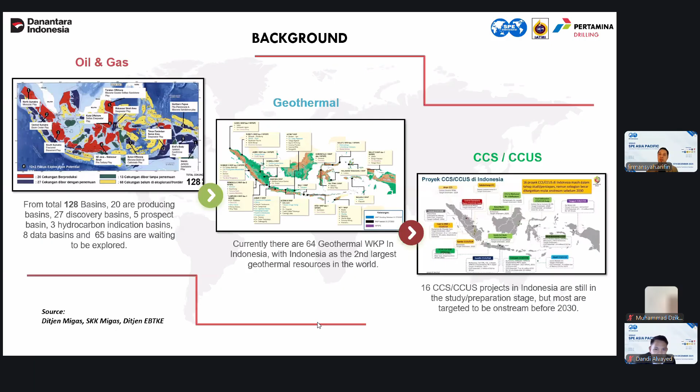This is from SKK Migas: next year we have a target of 1,000 wells to be drilled, and by 2027 we will have 1,117 wells to be drilled. So this is a very huge activity for drilling, and not only drilling but well intervention as well. We will have huge activities in Indonesia. So hopefully we will have an oil field services industry strong enough to support all these targets and objectives.

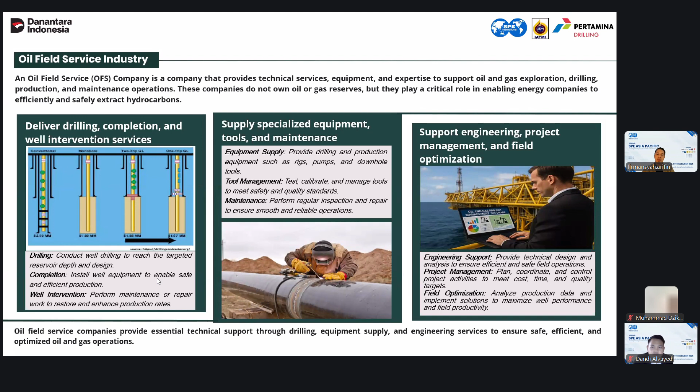And even now, with the era of digital technology and artificial intelligence, we may support engineering, project management, and field optimization. That will benefit the oil and gas operators. This is the taxonomy of oil and gas, where we can say that this industry is still in emerging markets. That's one of the conclusions in my research: since we still have huge opportunities in Indonesia, this is still an emerging market.

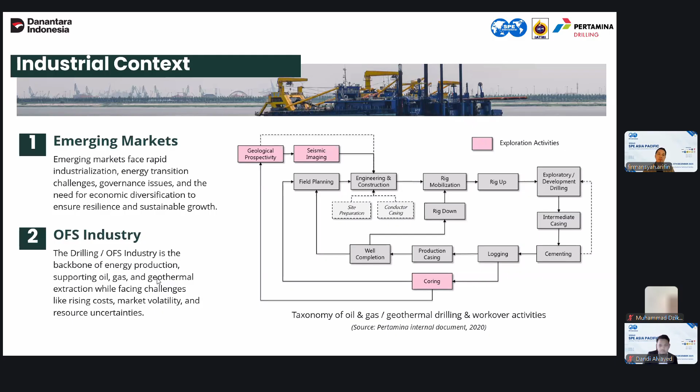This is Indonesia. I believe there are a lot of oil field services companies in Indonesia. In Indonesia, we have two associations. We have APMI; I myself am on the board of executives in APMI. APMI is Asosiasi Perusahaan Pengeboran Minyak, Gas dan Panas Bumi Indonesia. This is the only drilling contractor association in Indonesia. And of course, we have the global association, IADC, the International Association of Drilling Contractors. So both national and global companies are part of APMI and IADC.

I will start to bridge between the business and technology. As we know, OFS has a long and rich history since the first oil was found, and then spring pole drilling, the first gas well, how the rig was designed like a derrick, the rotary drilling concept in 1845, the mechanical percussion drill in 1849, and the Drake well. The Drake well in 1859 is very famous as the modern drilling well.

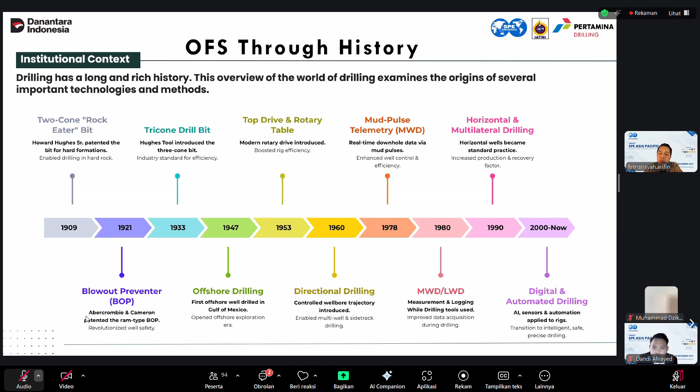And in the 2000s, up until now, we started digital and automatic drilling. For example, in PDSI in the 2000s, we started to use the latest cyber technology of the rigs, and not only rigs, but the equipment to support the drilling wells.

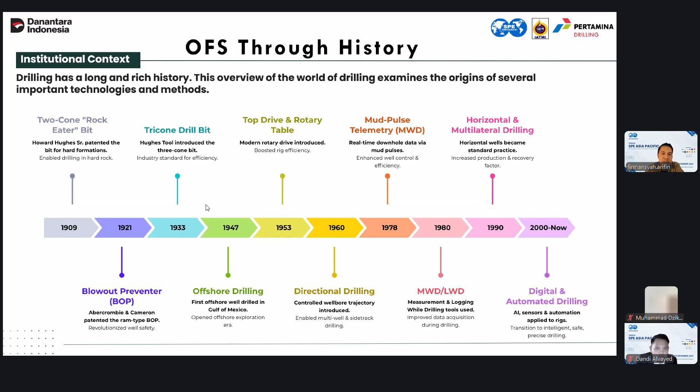Such as cementing, directional drilling, and other services. Okay, since I am as Pertamina Drilling, I will elaborate about PDSI's strategic roles as the largest oil field services company in Indonesia.

Why do I say PDSI is the largest? Since currently we have 58 rigs. Of those 58 rigs, 53 are land rigs, ranging from 250 to 2000 horsepower. We operate 3 jackup rig units with strategic alliances, and we have 2 offshore heavy workover rigs. This is standard access rig, 2 units. And in terms of assets, we have more than 110 assets.

Directional drilling, cementing - we have cementing units, drilling fluid, gas monitoring, and almost all kinds of services needed for drilling activities. And today we have the capability.

PDSI has the capability to deliver wells. So not only standalone services, just like rig or directional drilling or cementing, but we have the capability to deliver wells.

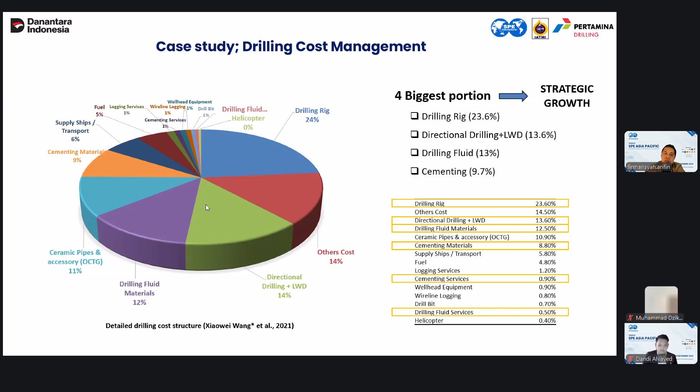Okay, I'm starting to elaborate about the rig technology evolution. Since PDSI is strong in land rigs, we have almost 50 land rigs, so I will elaborate on the modern land rig.

This is from the paper of Major et al., in 2024, already published as well. He put together the history of the modern land rig. You can see here, starting from the 1960s, what we call self-elevating drilling rig, with optimization on transition from derrick to mast. And then in the 1990s, land rigs with retrofitted DC top drives, with optimization in drilling ahead with fewer connections.

By using top drive, as we know, we will have less connection time compared to using Kelly or conventional technology. And then in the 2000s, retrofitted AC drilling rigs, with optimization from DC to AC, improvement in top drive performance, AC top drive. And then in 2002, the first land rig with integrated AC top drive and AC rig controls, with optimization of operational and rig-up efficiency.

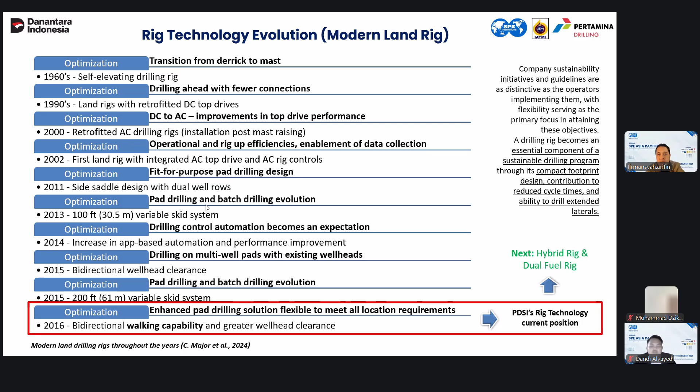This is PDSI walking rig, the latest land rig technology, based on SPE paper as well. We can see here this rig has experience with very good performance.

You can see here several robotic systems already put as the technology of this rig. For instance, the automatic catwalk system, which is common today. The cyber system with the latest rig digital system, and then for this land rig, we put the Iron Roughneck ST80s.

So with the capability of walking, based on our experience, we can optimize the drilling time before the target. This is one of our experiences using this rig. Previously, the target was 434 days.

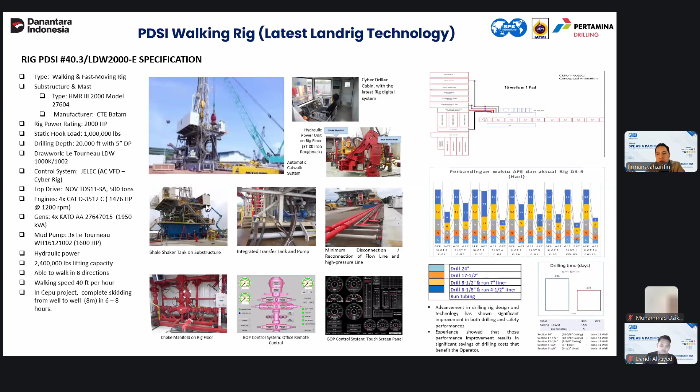Previously, the conventional rig for this system didn't have the capability to move in eight directions. So we created technology with a skidding system and what we call a rotating substructure, with rotating substructure capability. So the substructure is possible to rotate 360 degrees and move in any direction.

Previously, if we wanted to move from one well to the next well, it took 5 days. With this capability, it's now less than 1 day. So it creates efficiency and optimization for operational performance. That's our capability in rig technology.

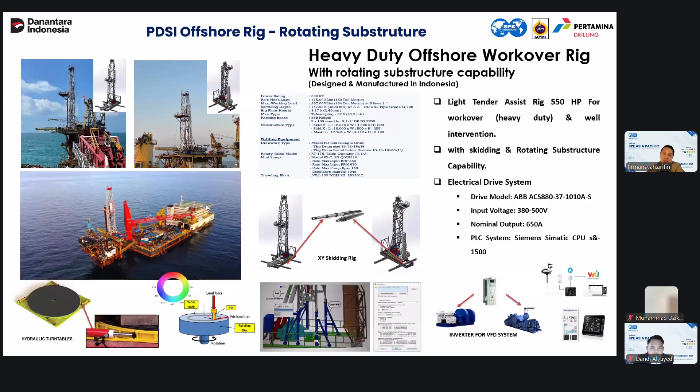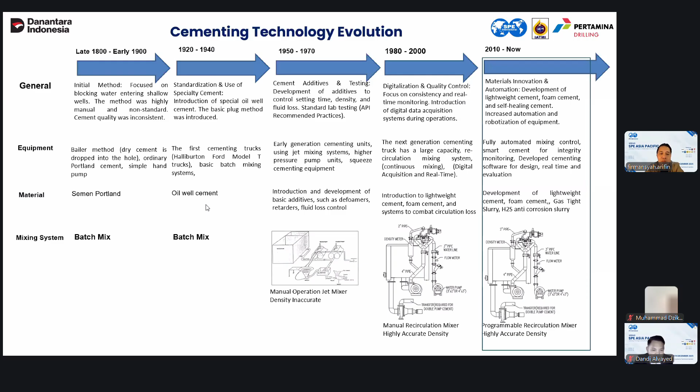Recently we have several cementing technologies here, from the evolution of cementing technology from the 1800s, then 1920s, 1950s, 1980s, and 2010. PDSI, of course, jumped to the latest technology for the cementing unit. Currently we have 5 units of cementing units — the next generation cementing truck, already purchased by PDSI, 5 units.

We have our next plan. I discussed with our cementing units that our next plan is software design playback, real-time monitoring and evaluation at the same time. That will bring benefit and optimization for operations in the future.

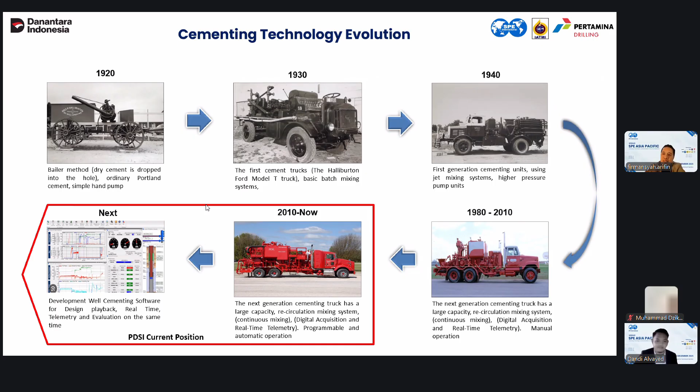I think that's all, Mas Dandi, from me regarding the business and technology. Thank you very much. All right.